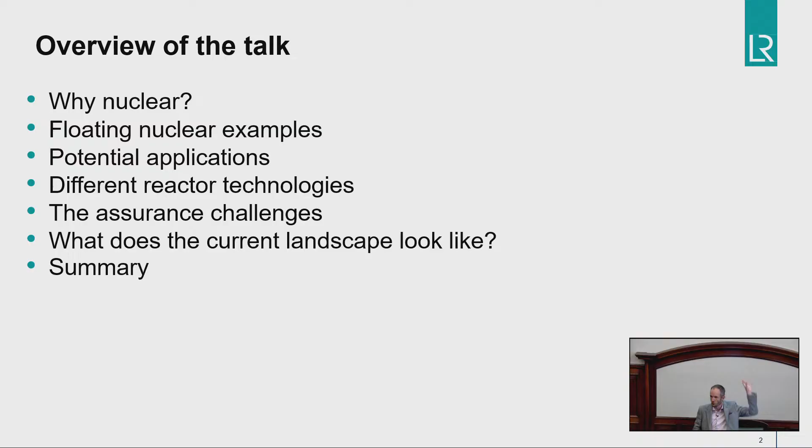So, why nuclear now? We all know about global warming and climate change, and shipping produces nearly 10% of the world's emissions. The IMO has put a decree out there to halve carbon emissions by 2050. As we know with these kind of statements, how do we actually achieve that, and what does it look like? There are various alternate fuels out there - biodiesel, LNG, ethanol, methanol - but every alternate fuel has its pros and cons, particularly around power density, where you get it from, and its volatility.

So nuclear, in this space, with the kind of technology changes, has been seen as a reliable alternative fuel due to its high power density, its ability to stay in the box, and its ability for zero emissions while operating. Yes, there are some challenges with nuclear, and we'll discuss that in the process, but it's definitely up there in the mix, and people are seriously looking at nuclear as well.

So we will understand that bit as well, and also the potential of nuclear as a disruptor.

So we talk about shipping and alternate fuels. Bunkering is a big consideration for ship owners. Fuel costs money, it's the biggest consideration with ships. We talk about slow steaming, but with nuclear we have the potential for ships to go faster, so there's a competitive advantage in there as well.

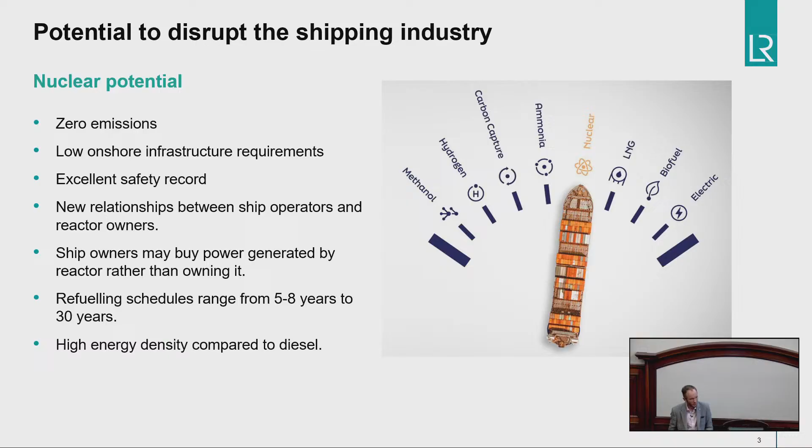So there's a different economic and political landscape for nuclear ships. I'm not going to dwell on the next slide too much, because I'm pretty sure everyone in this room recognises most of those vessels.

But these are the examples we've got of current floating nuclear - well, current, the Savannah's probably not current anymore, but it shows how it can be used. And when we talk about the Savannah, we talk about how that was the first test case, the nuclear age with Eisenhower, the Atoms for Peace program.

One of the reasons why it failed was the commercial viability of it. Nuclear was not commercially viable. It was a small ship, you had to have agreements between countries to allow that ship in there, so it just wasn't efficient. So the world has changed now, where nuclear is looking more economically viable.

You'll notice with my language I'm being careful how I term things, because I don't want it said Lloyd's Register said it is viable now - I'm talking about the technical challenges of assuring that, and that's what my lecture will focus on.

Also, my favourite being a submariner, I was a nuclear watchkeeper on Trafalgar boats. I thought an Astute boat looks a bit shinier than a Trafalgar boat, but again that's the ability to drive around a small reactor underwater.

So when we talk about small reactors, we're looking at the 4th generation, so into this technology as well. We're having small reactors that you can see in there. And then we have icebreakers - we have Russian icebreakers as well, so there is a commercial surface application for Russian icebreakers and Russian power barges. So two of the applications where we can see it already working in the world.

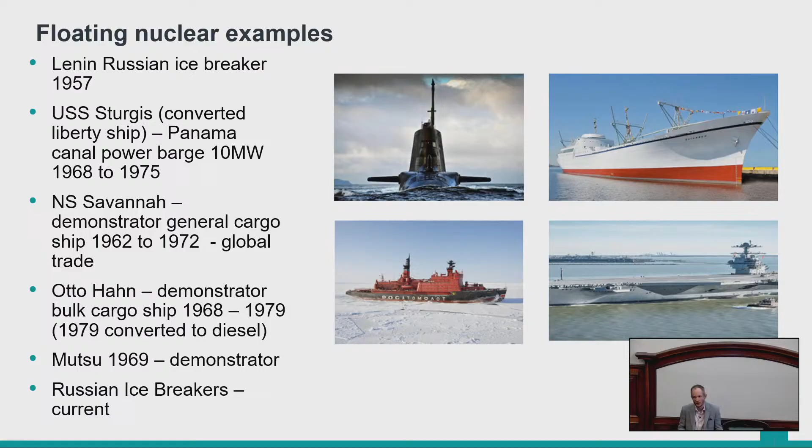And then obviously there's some other examples, such as the Otto Hahn, which started as nuclear and then got converted to diesel. But we find when we talk about nuclear, we always see the Savannah, and this audience is probably fully aware of the Savannah as well, so we won't dwell on that, and we'll talk about potential applications of where we can use nuclear and where it can become viable using with other fuels as well.

So hopefully the pictures come out okay.

One of the things that is very attractive about nuclear is power barges. The reason for that is you can have it in one nation's water, so you have one nuclear regulator, one flag. So it's very simple, and afterwards, when you've finished it or no longer want to buy the kilowatt hours, you take it away and it can move somewhere else or be disposed of.

Or that power can be put against one of these, a kind of floating fuels production plant, so you can make other alternative fuels. You can make green fuels as well, rather than burning carbon to make these fuels. So there's a different advantage in that way, that you can use nuclear to produce green hydrogen, and that can be pumped to shore as well. So we have the products of electricity and heat, and we can use them that way.

And then we've got the very stylish concept picture of a ship. This is what I was talking about earlier, a kind of ship charging around the world at like 30 plus knots, delivering that as well. I would quite confidently say we won't see this in the next few years, possibly the decade, because of political agreements between ports, and we're going to have a nuclear-powered ship.

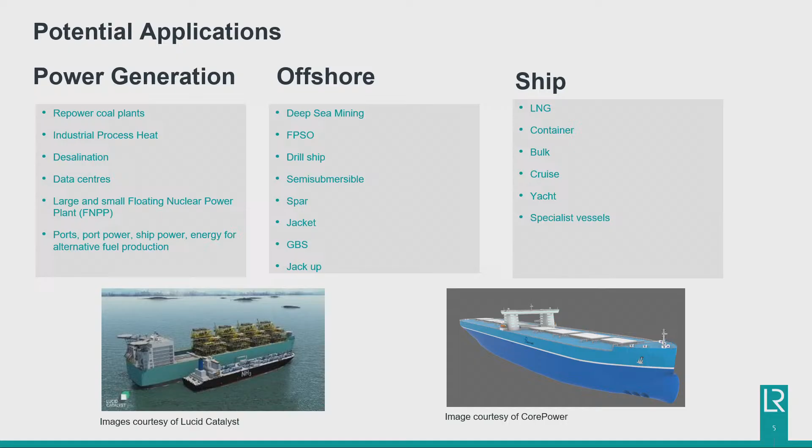It's going to produce 9% of the UK's electrical power needs when it comes online. But I suspect when it comes online it might be 8%, just because of the delays in that mega program. So these reactors are small, and the key bit is the ability to be produced a lot quicker than Hinkley Point, which can't be a bad thing.

But it's about where they sit on that scale - the smaller they are, what kind of regulatory constraints do we need on there as well? Do we have to go for the whole Hinkley Point site planning process, or can we use it like a gas turbine, as Lloyd's does for marine type approval - saying for this application you can build it like this with its certificate, that's its use case. If we take it out of that use case, we have to reapply the license process. So there's a sweet spot we're working toward, and regulators are trying to understand how it works.

So it depends how familiar this group is with classification societies and the role they play. We don't write our own rules - we propose rules, but our rules are created by what industry wants, as represented on our technical committee. They tell us where they're going, what their issues are, and what the technology challenges are, and we write our rules to suit. Effectively, Lloyd's rules from 1760 to now are a series of accidents written up to understand what happened, so that accident never happens again.

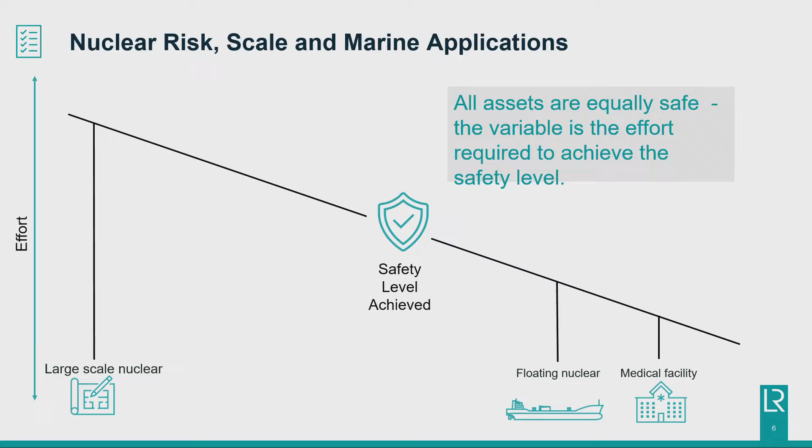We look at tragedies such as the Titanic, and then updates come in - such as you must have lifeboats for the whole ship's crew on both sides of the ship. It's that gradual process of learning from mistakes. But with nuclear, we have to be forward thinking and understand what the hazards are so they don't happen, because I don't think we can learn from our mistakes in nuclear. This is why we've looked at where we are in that sweet spot of safety levels.

Getting the private sector as part of this is one of the key drivers for change, allowing innovation to happen. We've still got training and people to think about - I'm very keen on that. I'm a submariner, I've left the Navy, they trained me, I've done my time, and I'm now working for Lloyd's. Where's that conveyor belt of people we need to operate this? And also, where are we going to get the fuel from? There's still challenges on that.

And then end of life - what do we do with reactors? So we are aware of the challenges, but what we're driving forward is how these can benefit us in shipping and help with climate change. I'll talk about this lightly, each reactor type, and I'm happy to take questions in more detail. I've got about 4 different types of technology, and I'll briefly explain them - you're a very educated audience, so you might know a lot of this already.

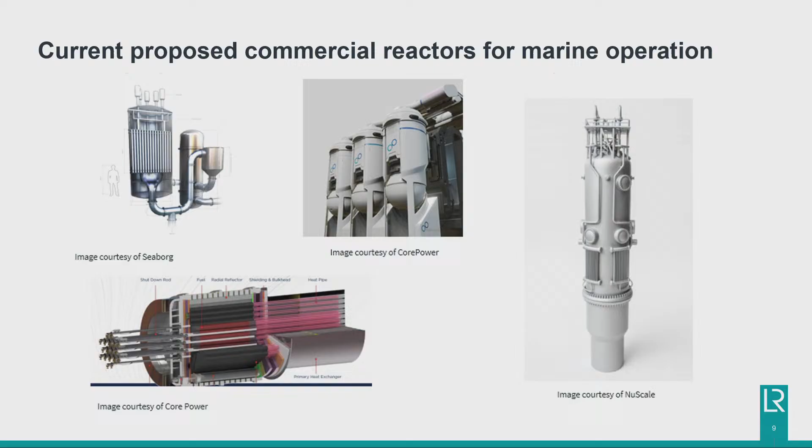So we start with my favourite one, the pressurised water reactor. It's my favourite because that's what I watch keep on, so I'm used to the physics behind it.

The key feature to these Generation 4 technologies is their safety levels - they are not pressurized systems. They have passive safety features to protect them. This operates exactly like your kettle - it produces steam, which goes into a turbine, which generates electricity, or you can take that steam off for heat. It's technology we're all used to in the marine space, from icebreakers, submarines, aircraft carriers, to land-based structures. But the safety systems here are one of the key bits - keeping it at ambient pressure rather than pressurized.

Because what we have - if you live in Plymouth, you'll be issued iodine tablets for your thyroid. This is because we have something called an emergency planning zone. If you lose coolant to the reactor, you'll get a large bang, and that will spread nuclear material over a radius. Your emergency planning zone is to work out what that radius is and protection measures within it.

So the technologies we're looking at now will potentially have smaller emergency planning zones. I won't say no emergency planning zones, but the goal is to keep them very much contained within the ship's structure, so ports don't have to have all that extra facility to take them on.

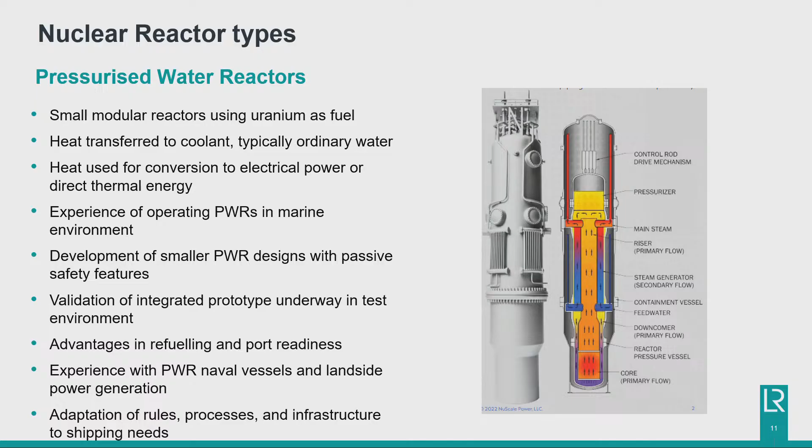You may have seen this one on lots of computer-generated images, reactors that sit in shipping containers where you can swap in, swap out. The US Army are looking at this as forward-based power provision, because in conflicts such as Afghanistan a lot of injuries happened transporting fuel to bases. If you had your own power supply on the base, you'd reduce the number of convoys needed. Then we have marine applications, looking at about 5 to 10 megawatts of power - a heat pipe reactor could be exactly what you're looking for to put on your ship for a bit of extra power.

Navies are looking at it as well - if they have extra sensors, they can put this power unit in there. It uses a vapor system to evaporate and condense to provide cooling of the reactor. So again, a passive cooling system, which is the key thing. But again, a very, very low megawattage compared to Hinkley Point, which is in the gigawatts - you can really see the difference there.

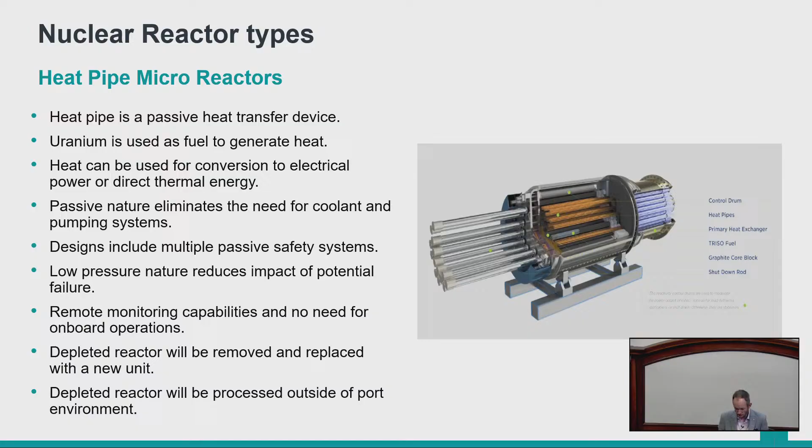Next one, we've got the molten salt one. This is where we're talking about more than 10 megawatts, potentially up to 50. This isn't quite the holy grail, but it's the one that a lot of people are looking at as the main front runner in this technology.

Back in the 50s, when Admiral Rickover was in charge of the US Navy reactor program, they were looking at molten salt and pressurized water reactors, but because of the advent of the Cold War and the potential for pressurized water reactors in submarines, that was the technology chosen, and molten salt was parked.

The fuel is dissolved into the molten fluoride salts flowing around the core. You have the ability to top it up as you go - a bit like putting salt crystals into your dishwasher, as a crude analogy. Also, if it all goes wrong and there's an issue, you can drain it out and it solidifies in a tank at the bottom. I must admit, once it's solidified in that tank, you cannot restart it, so it is a very expensive process. But this is one of the safety systems we've got for this different type of reactor.

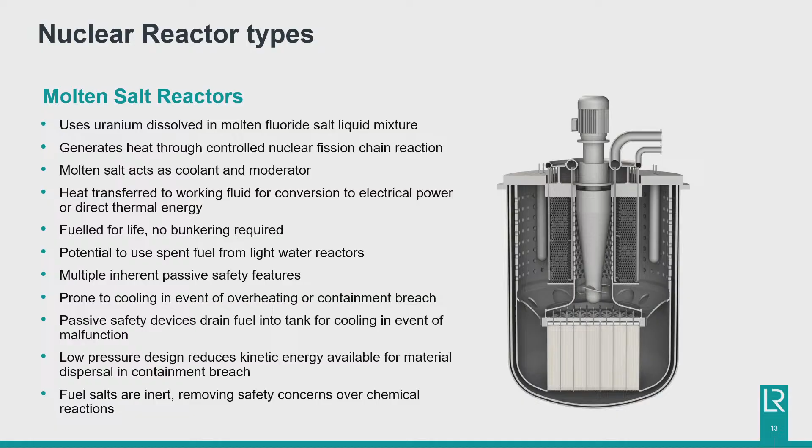I've got a couple more here as well - we have a high temperature gas reactor and lead-cooled reactors. The Soviets experimented with sodium-cooled reactors for the high power density, but if you don't use it, the sodium solidifies, and it's also not very good in water - so there are those challenges. Then we have high temperature gas reactors, which are cooled by helium.

So there's different technologies, but it comes down to different potential applications. If you've got a large FPSO, you may want something like a molten salt or high temperature gas reactor. If you've got a small ship or a small power barge, you may want a heat pipe reactor. So there's different types of reactor with different power outputs, suitable for various applications, with the ability to be moved or turned off - those are the benefits.

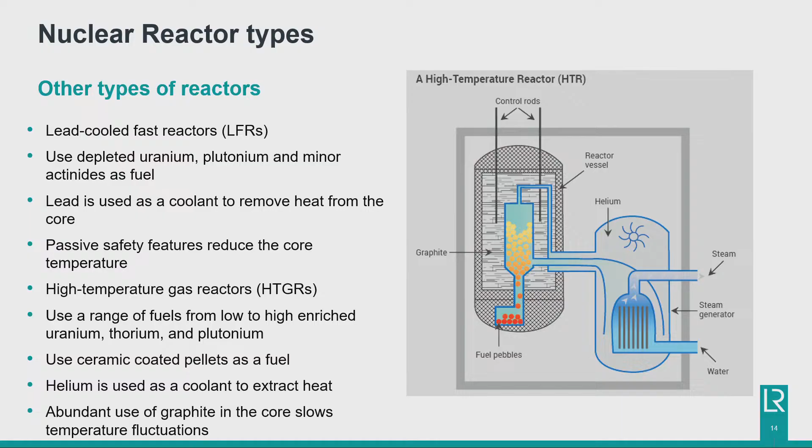So I've explained why it's to the fore, I've done a history lesson, we've talked about the applications and what Gen 4 reactors look like. I'm now going to move on and talk about the assurance challenges - this is the bit that gives me more grey hairs than I should have at my age.

We have the two bodies here, and I mentioned SOLAS Chapter 8 - that's the only provision they have for nuclear-powered ships. It's very Cold War, it came into force as shown on the screen, it's old and hasn't been updated for new technology. The IMO is actively working on how this code needs to be updated and what needs to go into it, but the IMO doesn't work quickly, so this will take several years to come into force.

As mentioned in the bio from Gary, I actually worked in autonomy - we worked with the IMO to get the MASS code for autonomous ships out, and that's taken probably over 5 years, where they're still arguing over text and sentences.

My previous boss loses two weeks of his life every year trying to sit in the IMO to try and make progress. So don't expect changes to happen quickly.

Then we have the IAEA. The IAEA's main goal is to stop the proliferation of nuclear material, so it's a very different mandate to the IMO - it's about how that nuclear material is controlled. They are both UN bodies, but they have different views, and they have no reason to talk to each other.

But now, because of climate change and potential applications, these bodies are talking to each other. And Lloyd's, part of our role is acting as that kind of conduit between talking to these bodies and saying how it could work in the marine environment.

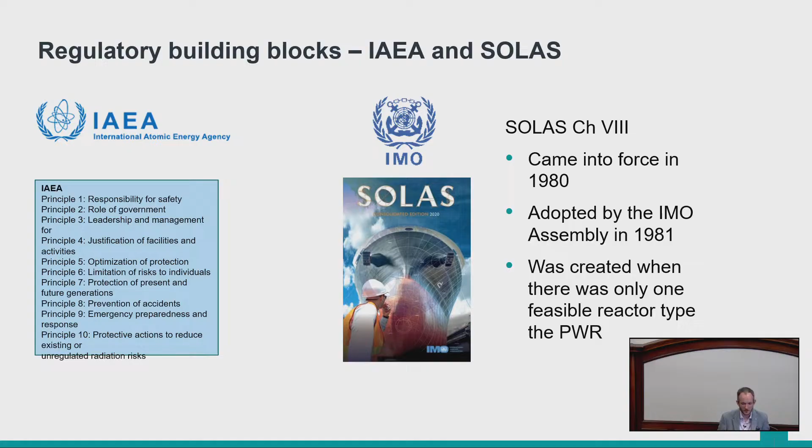But you'll be pleased to know that the UK is at the forefront, which is good. They are actually looking at how they can benefit from this potential space. So it is in UK law - the UK can flag a nuclear ship.

I'm not sure how it would happen at this current point, but they have made this provision for that to be allowed. So we have been speaking with the UK government about how the UK can be a forerunner for this technology application, especially with the small modular reactor competition in the UK, about these power stations supplying the UK's needs and how it could fit into the maritime space.

Hopefully my animations work on the screen. I wanted to give you an example here of how it could work. I specialise in goal-based compliance, and in goal-based we love a triangle. We work from the top down, and these are the various layers we've got in that triangle.

So we've got UK law, which takes it from statutory convention, and then we have our regulators such as the ONR, the Office for Nuclear Regulation, and the MCA, the Maritime and Coastguard Agency. They pass the requirements down, which we have to follow. Then we have the class rules that sit underneath, designed to meet statutory conventions, and standards that sit underneath to support that.

So we don't have rules for nuclear ships yet, but we've got the standards, we've got solutions - it's how do we put it together in a recipe that works, and we can show to the regulators this nuclear ship, barge, power station is safe and meets their requirements. This is an example of the various bodies we have to interact with as well.

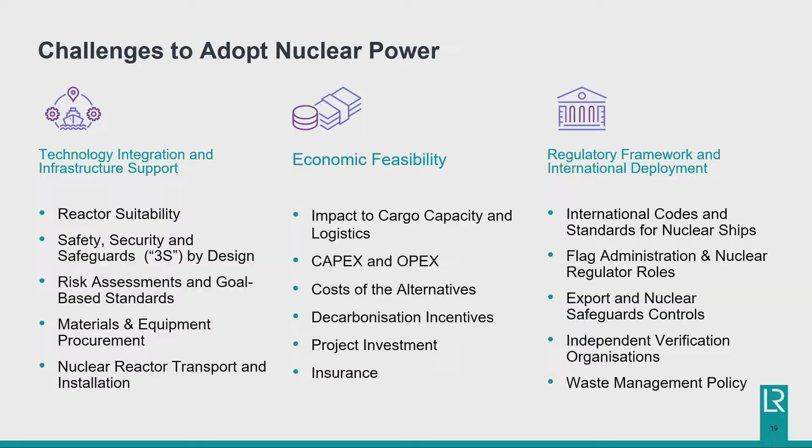Lots of challenges, and this is something we're doing as well, talking to regulators and saying, this is coming, what do you think? This is what we think. Is this what you think as well? What do you want us to do? And again, this shows us the kind of strategies in there.

And it is public perception. Once we start seeing a few of these projects working, test cases, I think the public's perception will probably change and we will move towards more of that space. But without public perception changing, it's a bit of a blocker in the nuclear space.

This is where Lloyd's are looking at the moment, frameworks. Rather than writing prescription on technology we don't know what it looks like or operates, Lloyd's rules started in 1760, lots of experience with ships, limited experience with nuclear ships, going to put it out there. So how do we assure something we haven't seen or have the experience of?

Frameworks is one way of asking the right questions. What are class societies good at? They're good at material assurance, equipment, components. If we put this together, we can work with regulators, work as part of the safety case and build up confidence in the industry, helping join the nuclear world and the marine world.

And then we can start doing some first-of-a-kind projects to understand what it would look like and the remoteness as well. Because one of the challenges we've got, say if we take the offshore space, I could build my vessel in Korea, but I want a flag of convenience, but I want to operate it somewhere else.

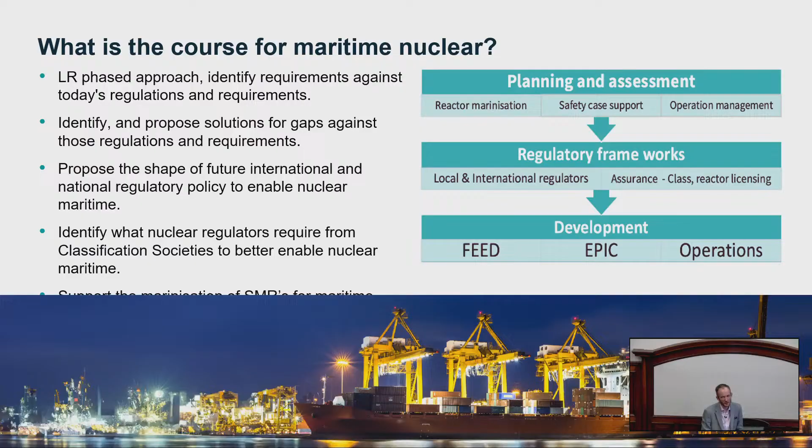And this is one of the challenges that the AUKUS program will have to work out as well. But being a military program, there's different ways around that. I talk about military because we're looking at how do we work in the marine environment, and the UK's got a very good example. We have the ONR, and then we have the naval regulator as well. Unsurprisingly, the naval regulator has the same amount of regulations as the commercial regulator.

Pretty much identical. What they have is about 5 or 6 extra regulations you have to follow, such as discharge, decommissioning, and propulsion. But very, very similar. The point of this slide is to show that you can take something from the land-based, make some changes, and it can work in the marine space as well, following that kind of strict structure.

The UK operates in a goal-based system as well, which is nice. It fits in very nicely with that triangle I showed you before. So we can build up solutions, answer those questions when we talk about site boundaries, the 3 S's, emergency planning, training. Training never goes away. Training is always a headache. There's never enough people, and in the maritime space, that's more prevalent than ever.

If something goes wrong, it puts itself into a safe state. So actually, you don't need training as a nuclear specialist. All these have got to be worked out in there as well.

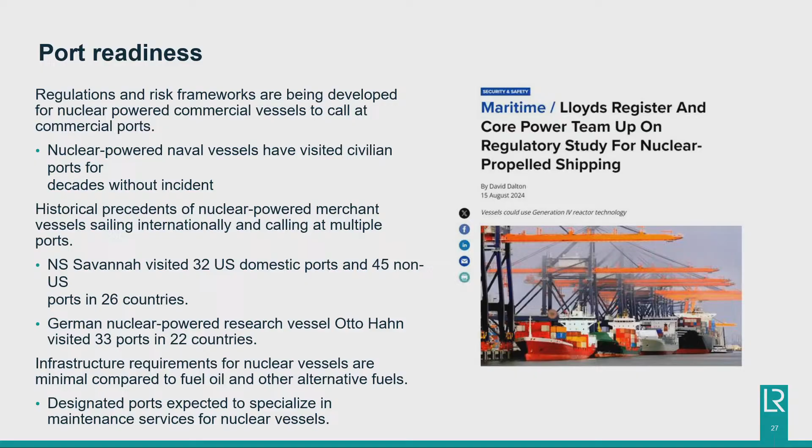You'll be pleased to know I'm getting near the end. I've got one last slide I want to show you, then a summary slide, and then I'll try and answer questions where possible.